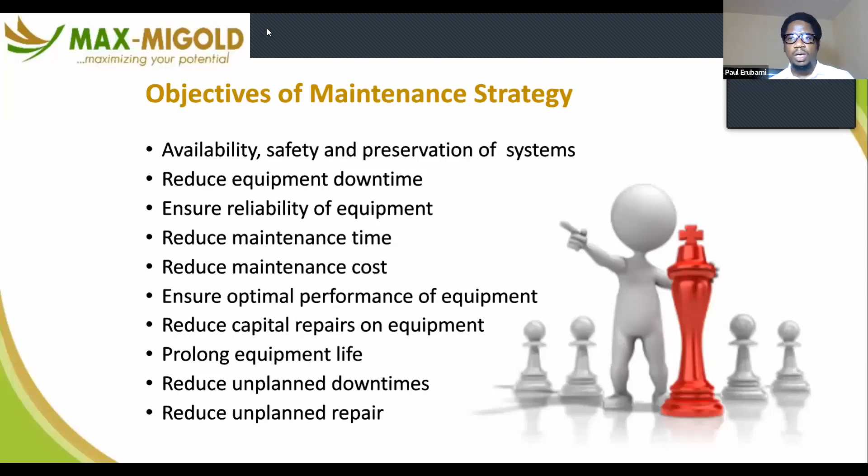Your maintenance program should not on its own become an impediment. This is one area where facility managers need to think about why they do the what and the how. If you are having to shut down equipment at a critical time of need to do something as good as maintaining it, you are becoming a nuisance to the organization. So you need to revisit why you are doing what you are doing. What did we set up that equipment for in the first place? What are we getting from that equipment? How critical is that equipment and asset to us? Must I do this activity at this time? How much disruption are my maintenance activities going to create for the users of the facility or the assets?

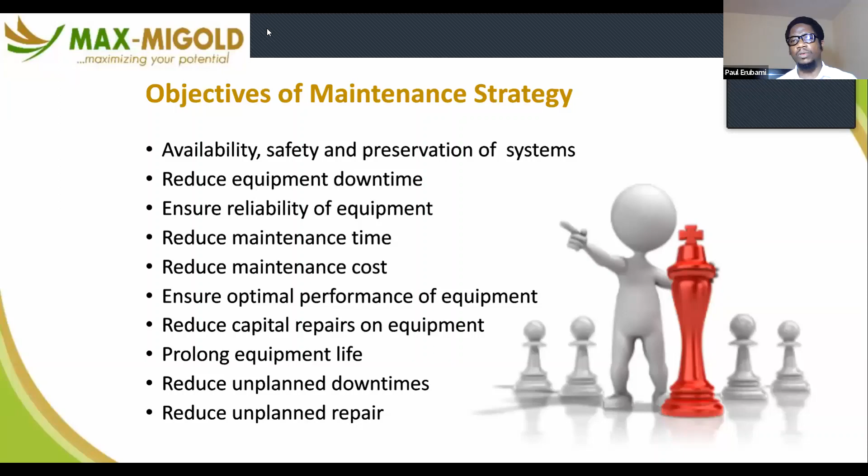And then what about costs? You can't maintain at all costs. In fact, some people have maintained at so high a cost that owners of certain properties have decided, you know what, let's just leave it, don't bother, when it's broken we'll replace it. Of course, when we get to the strategies, you'll begin to realize how cost and reliability relate, and exactly why certain decisions are taken that you may not agree with management on in the course of using or running your assets. And then, of course, we want optimal performance, reducing capital repairs on equipment, upgrades and overhauling.

You want to prolong the life of the equipment as much as possible. Every equipment will go through a degradation curve, a time when it's high in performance, then the performance dwindles until you cannot do anymore. But you want to elongate the x-axis on that curve, which is the time or lifespan of that asset.

You want to reduce unplanned downtimes. It's bad enough that you have to shut it down sometimes for routine maintenance. You don't want to also suffer the equipment shutting down when you expect it to be up and running. And all those unplanned repairs have a ripple effect on your equipment—one part breaks down suddenly and then it grinds on other parts.

You try to get equipment to do a critical repair quickly, and then you have to bear so much high cost because you're under pressure to deliver quickly. You don't have a lead time you can wait for, and so many complications can come because of unplanned repairs. And then management sees you as ineffective, as not productive, as wasteful, even with all your best intentions.

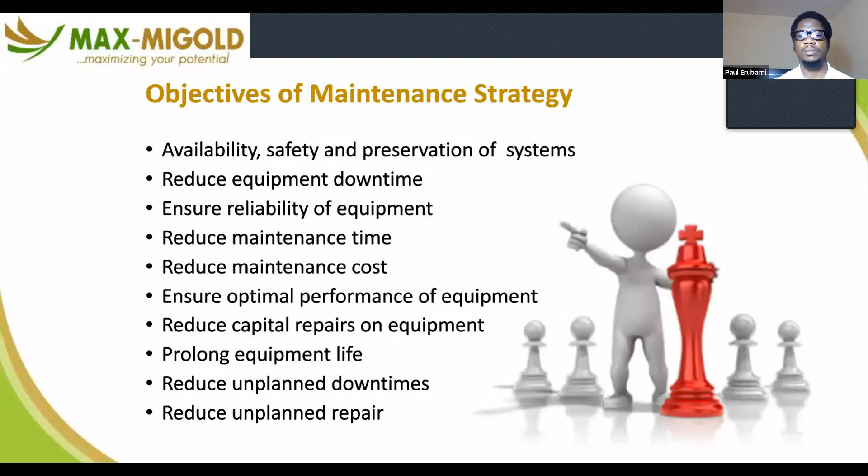So what do you consider when choosing a maintenance strategy? You think about your understanding of the methods of each strategy. Each strategy has different methods, different goals, and there are advantages and disadvantages of every strategy. The advantage and disadvantage of every strategy will not even be the same for every asset category or asset type. Therefore, not all strategies that may be advantageous for one asset class may be useful for another.

For example, your block work in your buildings—one strategy may work for maintaining and managing your block work, your roof, your floors, your doors and windows, most of the static equipment or components in your facility. That strategy will be very wrong if you try to apply it to moving equipment with moving parts, for example engines and machines with rotating parts that are having friction on an ongoing basis. The strategy will have to be different.

So you have to think about how you put together a maintenance strategy. If you've not defined a maintenance strategy, your maintenance plan, no matter how proactive you think you have been in developing it, you are making a mistake. In fact, without defining a strategy for every asset line item, most of the things you are doing regarding maintenance of those assets are all wrong.

Okay? So even if you've copied what people have done before that has worked for them, you've brought it into your own space—you start thinking about the why and developing your own strategy for that asset, you may be making a huge mistake, even with the same asset. And that's what we're going to learn in today's class. This is elevating your thinking about maintenance beyond the day-to-day mundane task of maintenance to why we even have those activities set in place in the first place, right?

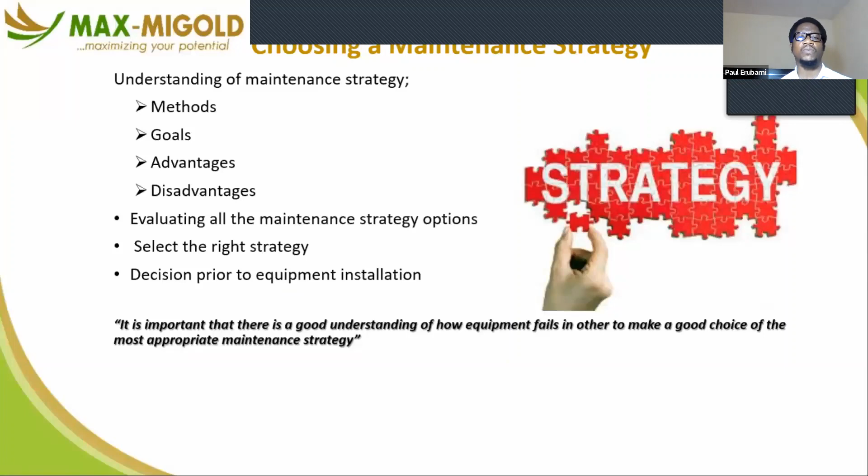Then two, the kind of impact you have on assets—for example, environmental impacts, rate of use—might have different levels of deterioration impact on your facility or your assets and components. And as such, you must think about what strategy to deploy in managing such facilities so you can get the best result, or at least reduce the rate at which the condition deteriorates or increase the lifespan of that asset as much as possible.

Okay, so by the time we start looking at the strategies themselves, it will be easy for you to relate with these introductory aspects. How do you choose a maintenance strategy? What are the criteria?

How much do you have and how are those financial resources allocated and applied? If you have a system where there is a working fund, money is always kept in a pool, and you can be doing all your proactive plans without having to go back for new approvals and disbursement, you might think about a strategy that does not require stocking up or doing anything big at a time. You just go with the flow—what's due on Tuesday, the material coming on Tuesday, you get it done and move on. But if you have to go through a long cycle of capital acquisition, disbursement, and approvals, you probably say, instead of going through this cycle over and over on a weekly or monthly basis, I better stock up for a quarter.

So your strategy is going to be affected by allocation of available resources, including the kind of manpower. If you have staff in-house to handle all the activities, your strategy will be different from when you have to call out a vendor who takes your request, processes it, sends it through staff, and gets them to your site. The strategy will be different depending on the kind of resources available and how they are allocated.

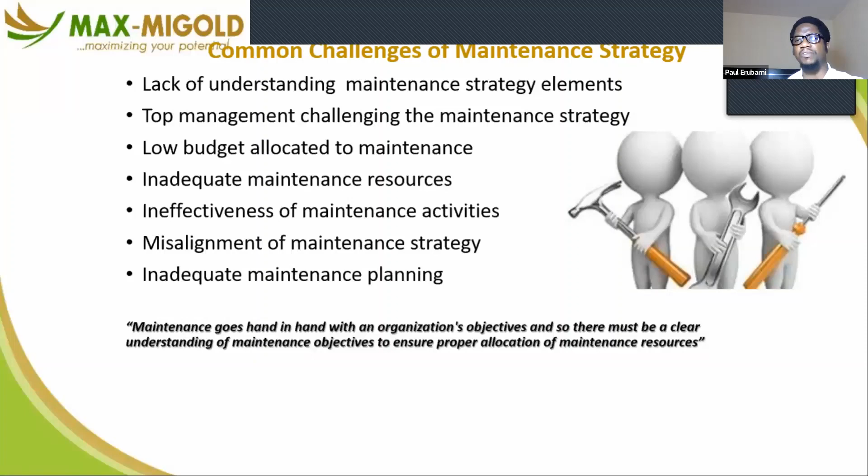Maintenance goes hand in hand with an organization's objectives, and so there must be a clear understanding of maintenance objectives to ensure proper allocation of maintenance resources. If your maintenance objectives align with that of the organization, there's a very high likelihood that everything you want to do will always find approval.

So now to the first maintenance strategy. This maintenance strategy is the most common, the most popular. But many facility managers don't seem to realize that it's a strategy and don't seem to apply it deliberately as a strategy - it just happens to them. It's called run to failure. This is also called reactive maintenance strategy, corrective maintenance strategy, or emergency maintenance strategy. Every one of the unplanned maintenance strategies merges into this run to failure strategy.

Because there are two types of maintenance, primarily: one is planned maintenance, the other is unplanned maintenance. While planned maintenance has more than one strategy we're going to look at today, unplanned maintenance has just one strategy. Every unplanned maintenance strategy is called a run to failure strategy. It simply means that you don't do anything - the maintenance activities for that asset is zero. If it fails, threatens to fail, manifests a fault or an impending fault or a disruption or a slowdown or whatever it is that is tending towards failure, you take action to bring it back. That's basically what run to failure is - you restore the equipment to its intended function.

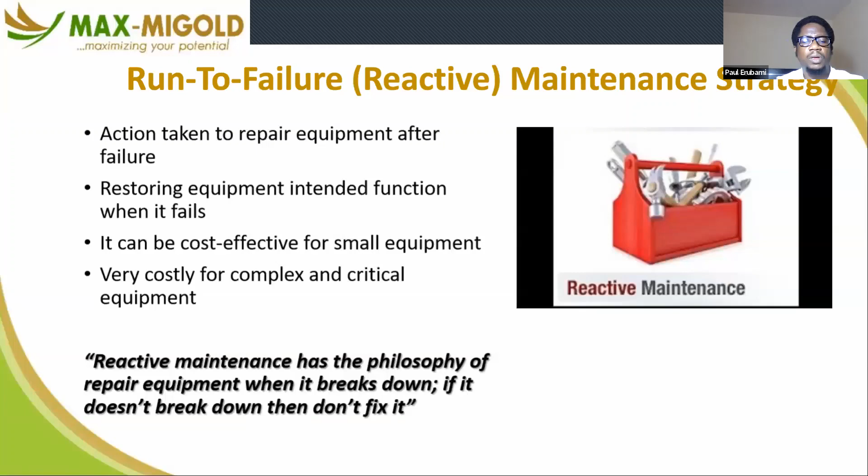Fix. Reactive maintenance has the philosophy of repair equipment when it breaks down. If it doesn't break down, then don't fix it.

I was curious. It's so hot, this furnace is so hot, how do you even carry out maintenance on them? Chief engineer says, this furnace has been on for 18 years, and it will take us months. If we even decide to shut it down to do maintenance right now, it will take us months to wait for it to cool down enough for us to do any kind of maintenance. And I said, aha, this, you will not put any other strategy. You kick it on, you use it until it coughs and puffs and stops. And then you have to deal with it.

Think about your wristwatches and wall clocks. Complex mechanisms. You hang them up there, put them on, drop them, until it develops a fault, stops, or something, battery goes out, or something happens to the spring. You don't do anything. Are you conscious about that strategy? Or is that a mistake that you're allowing like that?

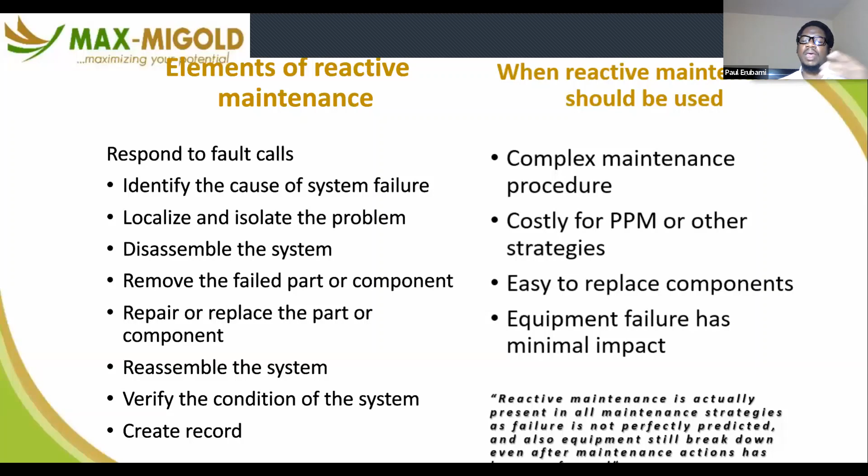Reactive maintenance is actually present in all maintenance strategies, as failure is not perfectly predicted, and equipment still breaks down even after maintenance action has been done. You need to be conscious about what this strategy is and how you are applying it, because there are certain implications of deciding to use this strategy to manage your roof, your walls, your furniture, your fittings, and so on. Those implications are what we're going to look at.

You don't have to put people on standby because you don't have routine activities to perform. Initially it looks like low cost, especially for equipment without moving parts. Moving parts, I wouldn't recommend this strategy, and we're going to see why as we go to the next strategy. And then there's not much to plan. If what you have to plan is a plan that says don't do anything, how much planning do you still need to do, right?

But the labor cost will be high every time you have an incident, same with your repair costs. The staff assigned to routine activities in your normal operation will be suddenly diverted to deal with repairs that just rear their ugly heads when you were not expecting it. So your staff resources will not be efficiently used. Equipment will not be reliable, especially for equipment with moving parts and critical equipment, because you cannot predict when they will fail, and that is a problem for certain assets.

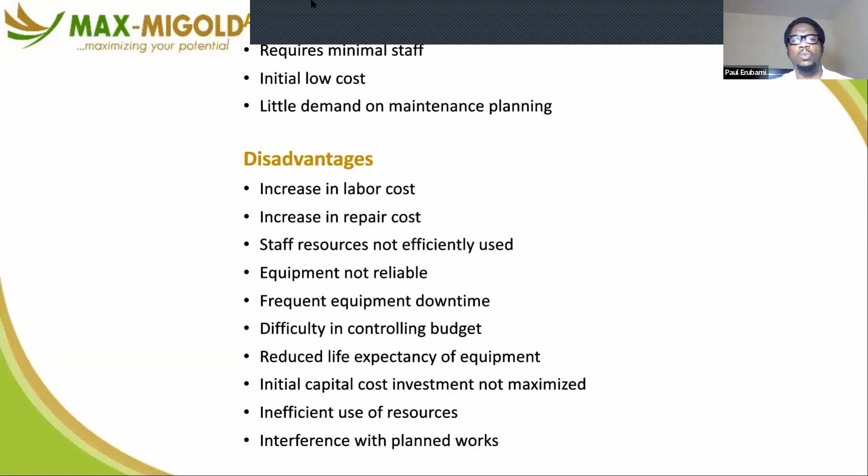And then there will be interference with planned work. Just the same way you have people who should be doing planned work being drawn out to come and take care of unplanned activities. So that's all about that first strategy.

It is, in my opinion, the most important strategy. And don't think that because other assets that you deploy other strategies for will fail, therefore the strategy has changed. Strategy is something you set. You work with the strategy. Strategy remains what it is, even if you fail to implement the strategy. And it is the most important strategy for me, again, because it accounts for a majority of all our assets.

What makes FM look so confused and disorganized, and always running from pillar to post, is because they don't think of the assets that require this strategy and deliberately assign the strategy and make plans to ensure that there's resources to deploy this strategy. They go from hand to mouth, cap in hand, every time something happens. Rain falls and the window is blown out. Oh, it's an act of God, right? They do not envisage or anticipate that a window could be blown out.

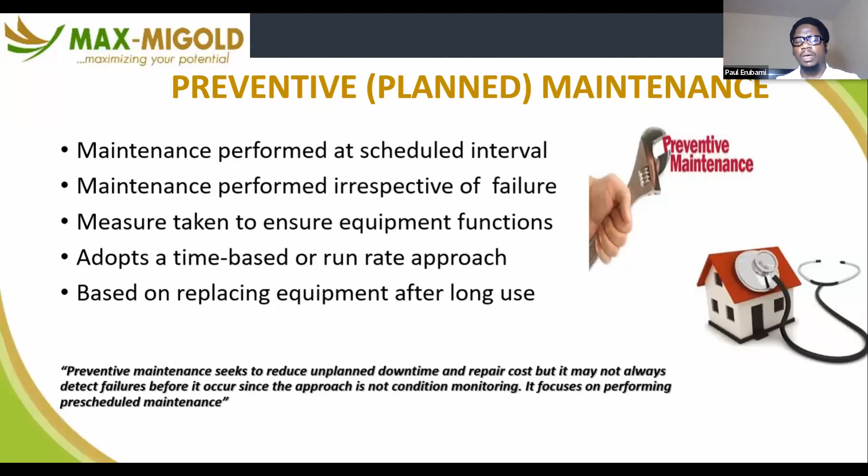So you can have a plan for: I have 500 windows, 2 or 3 could be blown out this year. Last year it was 1, the year before it was 2 or 3, and so on and so forth. That's the kind of thing we're talking about. You forecast and you plan and you budget for it.

This second strategy, the preventive maintenance strategy, is very familiar to many FMs. The routine things that you do on a regular basis. In fact, the word PPM is a buzzword in facility management.

You put certain assets on a spreadsheet, and you put some frequencies, and you put some activities that need to be within those frequencies. You put who would do it, how much it's going to cost, and you build out something. Oh, yes, fantastic. Because at certain intervals defined by the frequency, those activities must be repeated on that asset. Doesn't matter whether the equipment is in good shape or not. You just have to perform the things that have been specified within those frequencies. That's what planned preventive maintenance is all about.

It adopts a time-based or a run rate approach. A time-based is weekly, monthly, quarterly, annually activities. A run rate is if you have a clock in the equipment that measures its rate of turning and working, like generators or photocopiers. They have a clock in them that tells you how many turns they make, and how they work. So you don't necessarily need to say, oh, my car has worked for 6 months, let me take it for servicing. No, you probably need to track the mileage. That's the run rate. The generator, the hours run, that's the run rate.

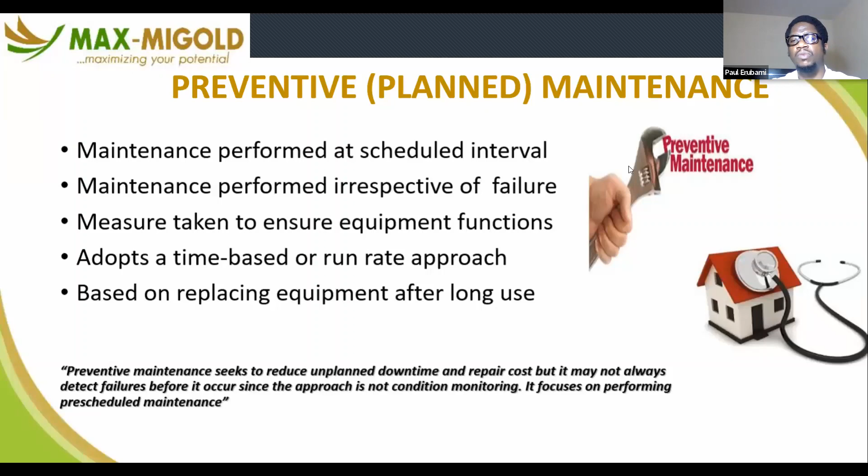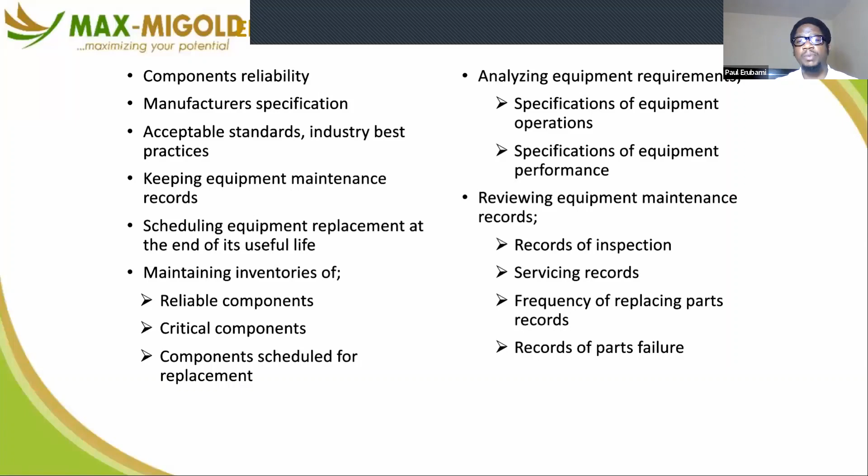The whole idea is stay on the safe side. If I keep doing what the manufacturer said I should do, I will not be blamed. And I have a record, because if you're doing routine activities, you just keep a record of when it was done, what was done. And you have a sense of accomplishment. You're doing something. It's also a sense of an alibi. If it fails, because it will still fail even if you do everything, well, I've done my part. Now that it fails, it's not my fault. I'm a good FM, right?

So preventive maintenance is the safest approach to maintenance. It is maintenance for dummies, if you ask me, because what needs to be done is defined, how it should be done is defined, when it should be done is defined. Everything - just read it and follow it line by line. You're good. You don't need to think or overthink the process. And because it's been pre-planned and pre-arranged, the likelihood of sudden failures or sudden disruptions is reduced. So you're safe to a large extent.

And then, of course, there's higher performance, reduced downtime, fewer repair emergencies. Equipment seems to work better. They're often safer, especially because not all equipment - not all assets - you will use this strategy for. For the ones it's most appropriate for, then yes.

Does it have some disadvantages? Of course it has. You're going to spend a lot more because you're going to have standby people doing routine activities. And there's so much activity you're performing that are not needed. Equipment is working perfectly, we are spending money on it, just because, of course, you don't want it to break down the line. But think about what you are doing.

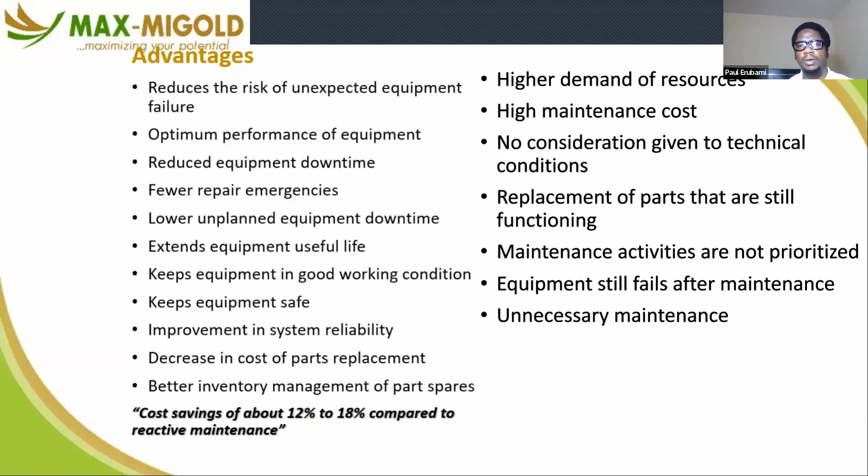If you're critical about the cost of your maintenance, you ask yourself: if I take out a filter, has that filter actually finished doing its work, or am I wasting some life of this filter? If I take out that oil, has it finished doing its work, or am I wasting some of its usefulness? So we say there's a lot of unnecessary maintenance. That's the key downside of this approach. In terms of giving you peace of mind, super, but then you pay a very hefty cost because you are doing something on a continuous basis, whether it's needed or not.

And that's what this third strategy is coming to fix. The predictive maintenance strategy is also called condition monitoring, or condition-based maintenance, because it evaluates equipment condition before acting on it. Going back to draw parallels from the two previous strategies: in run to failure, it has to actually exhibit a fault - that's what that strategy requires. In preventive, I don't even check whether it has a fault or not; in its perfect state, I keep doing what I'm doing persistently. In predictive, I don't want to waste resources on preventive maintenance, but I also don't want it to break down - it cannot break down. For it not to break down, I must preventively monitor it, track and trend its condition based on operating parameters set in place by the manufacturers.

Take your generators, for example. It will operate at a certain temperature, it will have a certain level of vibration - if it's more than that, there's a problem. It will have a certain sound level - if the sound level is more than that, there's a problem. It will emit so much carbon and so much density of this and that. These are all operating parameters - they have been specified, I know the ranges. If my equipment keeps working within those upper and lower specification limits, then run it, no problem. I just keep monitoring and tracking those operating parameters. If it stays within those ranges, I'm fine - temperature stays within the range, I'm fine. Keep running everything, just keep enjoying the assets, but keep your eyes on those operating parameters. That's what predictive maintenance is.

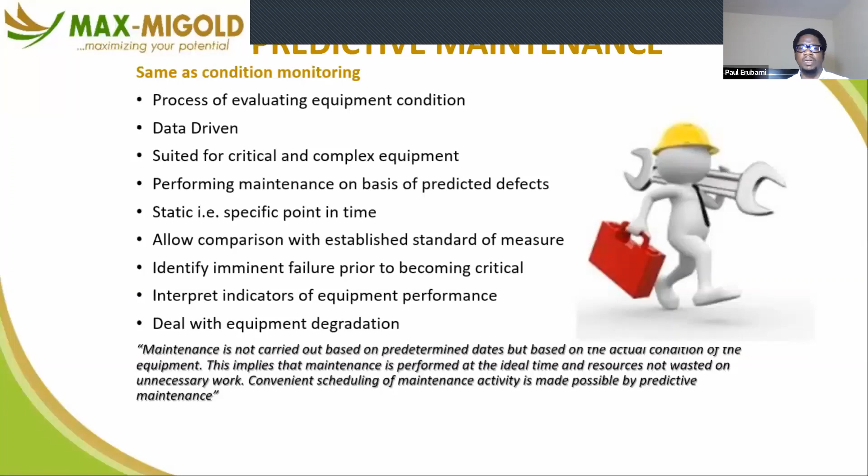Maintenance is not carried out based on predetermined dates, but based on the actual condition of the equipment. This implies that maintenance is performed at the ideal time and resources are not wasted on unnecessary work. Convenient scheduling of maintenance activity is made possible by predictive maintenance, so that what you are tracking and trending, you are acting on.

Take the engine of the generator, for example. The temperature is trying to go out. It used to stay around 40 to 44, and then for the last one week it has gone from 46 to 48. I know that the upper limit is 90 degrees. So what do I do? By the time it gets to 50, I can plot.

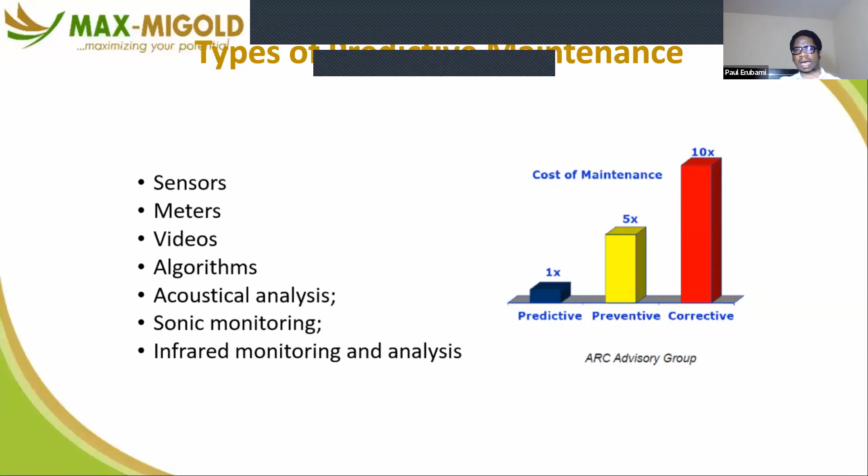By the time I plot, I know exactly what day, at this rate of rise, it will get to 90. I know how many days I have to act. So I go to the manual and troubleshoot for overheating: check radiator coolant, test, check, it's in order.

Not radiator. Okay, check the oil, take it, test viscosity, take dissolved metals, check density, looks okay. What next? Check the oil pump. Is the pump actually pumping the oil through the engine? Just checking. And if I find out that one pump is what fails or works intermittently causing this issue, I stop, I change that, and the temperature comes back to normal, and we're all happy again. All that routine maintenance I would have been doing will no longer be necessary.

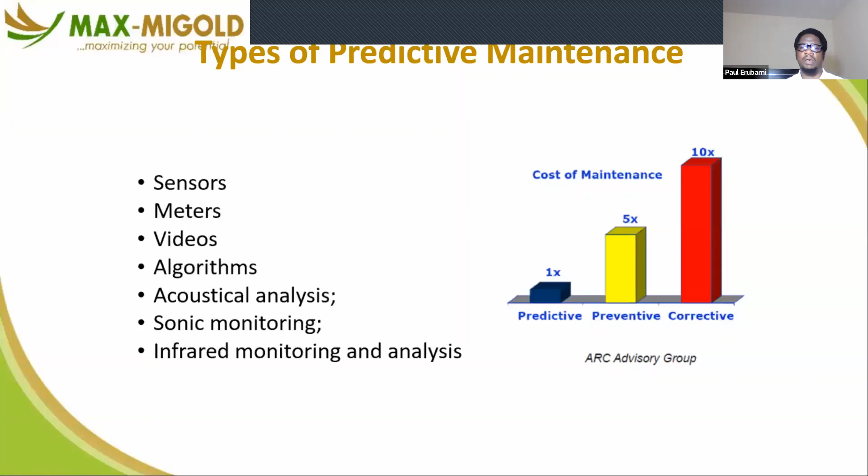But this maintenance comes at a front-end cost: data acquisition tools. These are some of the operating parameters that your equipment will be required to work within certain ranges, upper and lower specifications. As such, you must have systems in place for tracking where you are at a particular time relative to each of these operating parameters, so that you can know that it is within range or going out of range.

But again, the beauty of these three strategies of maintenance is for equipment that you will typically deploy a preventive maintenance strategy for, if you use corrective for it, you will spend 10 times the cost of maintenance, because breakdown has not just the cost of increased breakdown repair or restoration cost, but also the cost of downtime, which is the cost of lost productivity. So corrective can be very expensive, especially if it affects your core production or core productivity of the organization.

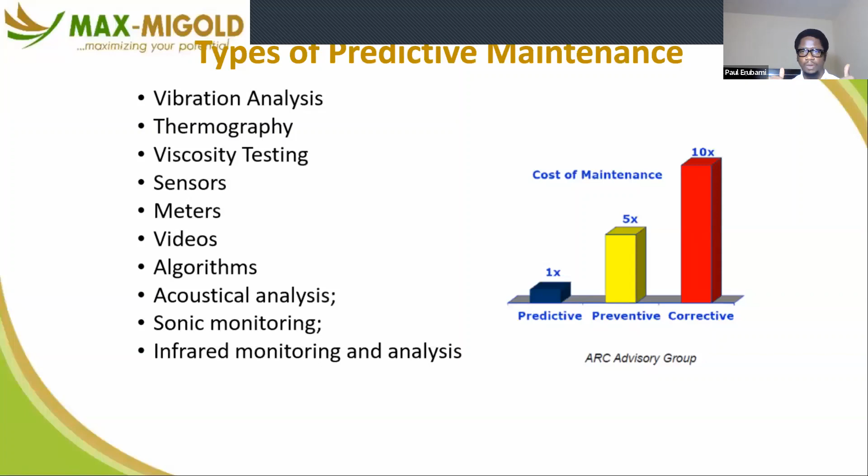Preventive is 5 times and predictive is the cheapest. So in essence, predictive maintenance is the cheapest form of maintenance if you can pull off the technicalities around it. The level of data and all it takes to acquire that data, analyze it properly, and make the best judgment out of it will make predictive an effective tool for you as a facility manager.

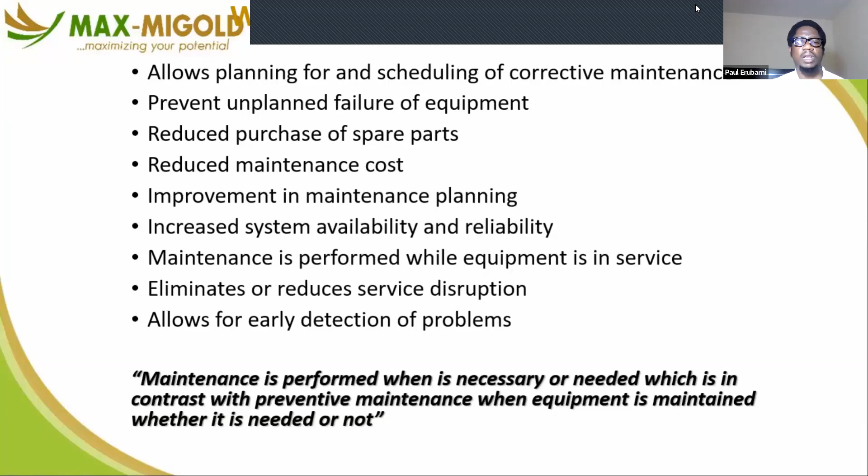So why use predictive maintenance? It allows planning for and scheduling of corrective maintenance, prevents unplanned failure of equipment, reduces purchase of spare parts, reduces maintenance costs, improves maintenance planning, and increases system availability and reliability.

Maintenance is performed while equipment is still in service. So it didn't break down by itself, and you didn't schedule it for maintenance. You just keep investigating and acting in such a way that the equipment can keep running. And then it eliminates or reduces disruption and allows for early detection of problems.

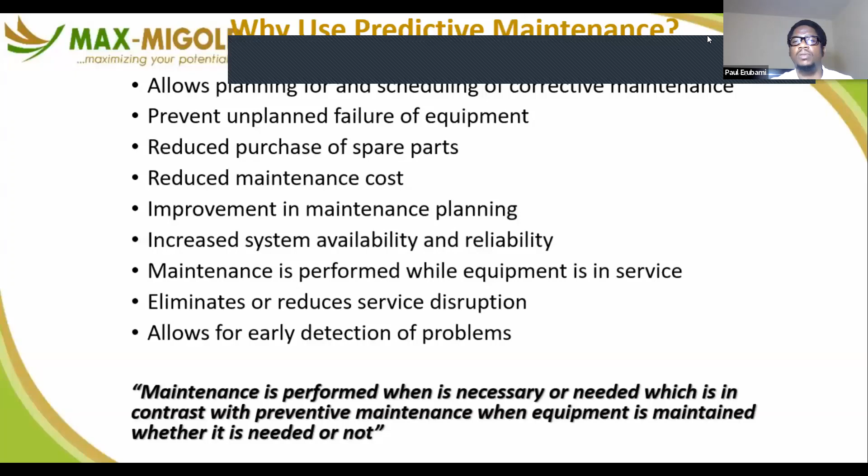Maintenance is performed when necessary or needed. This is very different from preventive maintenance, which is done whether it's needed or not. You just keep doing the same routine on an ongoing basis.

If you look at the advantages and disadvantages of predictive, you will see that it tries to fix the problems of reactive by making sure there's no breakdown at all. And then it also tries to fix the excesses of preventive by making sure that you don't do anything unnecessary just to prevent a breakdown. That's the beauty of this approach. But it's really, really top-end approach.

I mean, think about it. If you were the one managing the Kainji Dam or any of these major dams that are providing power to the whole country, how often will you shut it down to do maintenance on them? You have massive dashboards with sensors everywhere, bringing in data, telling you exactly how each operating parameter in every pump, every turbine, every aspect of it, even the shaft and the pulleys, how they are working, how the cables, temperatures are being monitored. You have all of them, how the oil temperature, everything, being monitored on dashboards.

That's all you'll be doing as predictive maintenance. Anything going out of range, you see that trigger, and then you go and act. That's the only way to manage very large equipment. I mean, think about it. If you're managing a gas turbine where the engine oil for replacement is probably 30,000 liters of high-grade synthetic oil that runs into millions of dollars, will you be replacing it every 250 hours?

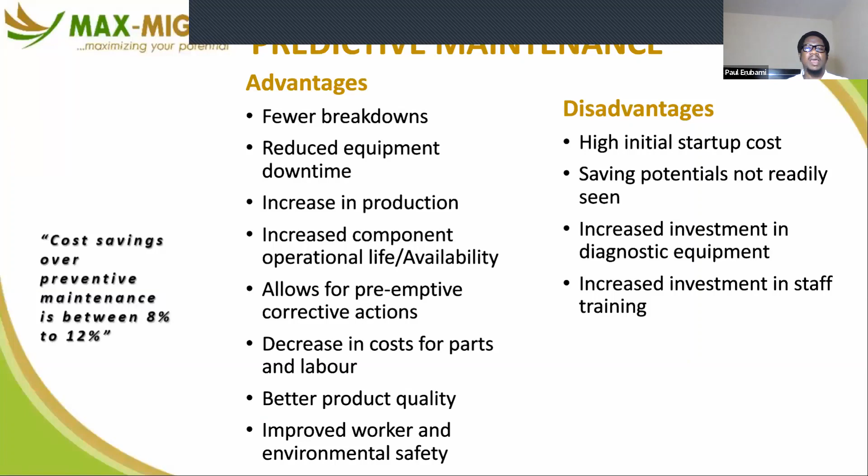So if you do oil analysis on a continuous basis, you can tell which particular components in your machine or engine are wearing faster. You can even predict when a particular shaft or pulley is going to have a problem next year and prepare, because you are seeing the level of wear and tear just by analyzing the oil on an ongoing basis. You will never have a breakdown, and yet you will never have to stop the equipment to go do maintenance.

Now, at the level of strategy, we are talking about each asset. One asset, what's the strategy for maintenance? The next asset, what's the strategy for maintenance? But as a portfolio of assets, we need to think about maintenance that gives us high reliability and low cost. How can we achieve that? That's where RCM comes in. It's a philosophy of maintenance that helps you select, pick and choose strategies for various assets with the goal of having overall portfolio performance at the least cost.

We call it the economics of maintenance. We combine different strategies for different assets just to ensure that overall we get the best experience, the least cost, the highest performance and reliability, and quality asset availability. It takes a longer view of the assets. So if you're going to deploy a strategy for your window ACs or split ACs that is different from what another person is deploying, it is because of your RCM analysis that you can make such a decision.

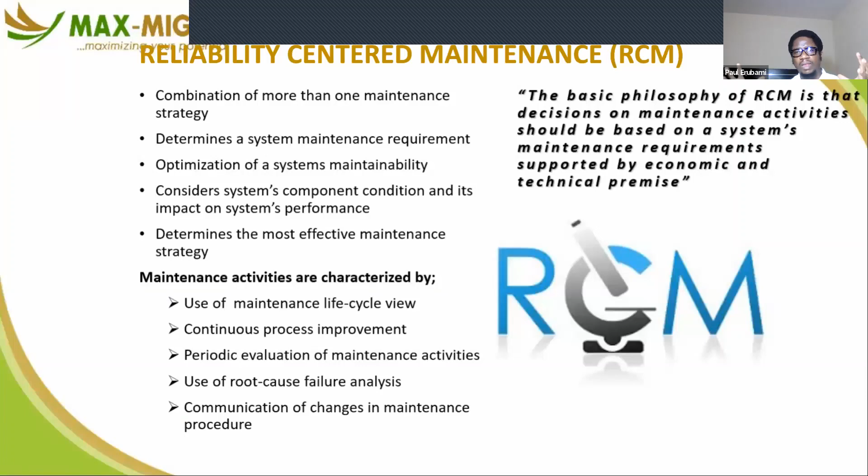The ACs probably are not critical, or their downtime will not lead to productivity losses. I will put them on run to failure just to reduce my routine maintenance costs. Whereas another person cannot put his own split ACs or window ACs on run to failure, because you need to do your reliability-centered maintenance analysis on your entire portfolio.

Now, this is where many times you have to think again. You may have a critical system like air conditioners in your server room. Very critical, the server room cannot go hot. But the server room requirement is 1 unit of a 2 horsepower AC, which can carry that server room conveniently. But just to make sure you don't have any issues with that server room, management has decided to put 2 extra 2-horsepower units, which means you have N plus 2, or 1 extra 2-horsepower unit, which means you have N plus 1 strategy of redundancy in that server room.

If I get the pleasure or privilege of having an N plus 1 or N plus 2 for any critical asset, I can adopt a run to failure strategy for that asset. Because I have a redundant, fixed-in-place replacement alternative, once this one shows any fault, the AC stops cooling, it starts making noise, it starts dripping water, I shut it down, I put the next one on, and then I take it out for repair. I don't need to necessarily come to do routine maintenance on this particular AC or any of the ACs, because I always have the time to use one or the other.

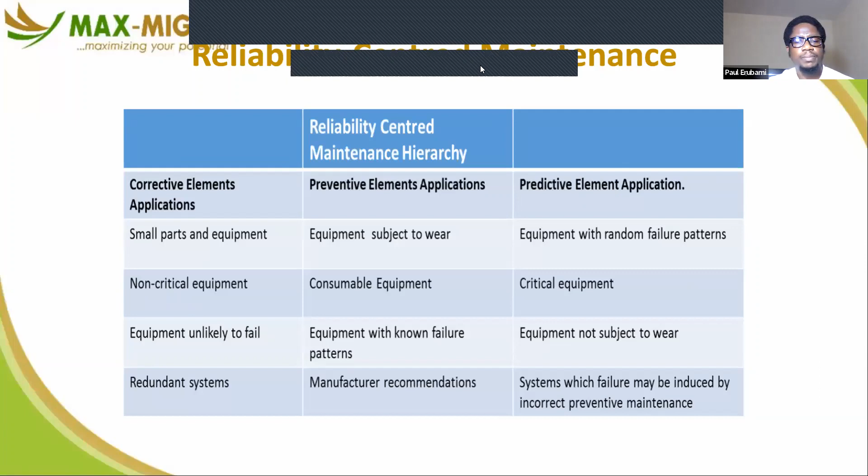And then I do the same thing: analyze the ones that are supposed to be on preventive maintenance, analyze the ones that are supposed to be on predictive maintenance using these guidelines. You can adapt or adjust this framework for RCM to suit your organization's requirement, your strategy as an organization. You can move some of these criteria around just to create your own RCM hierarchy. And then you use this to look at every asset one by one and say, this asset...

Where does it fall into? Then I now assign that strategy to that asset. And I'm assigning that strategy to that asset because it is the cheapest cost that I will spend if I use that strategy for that asset.

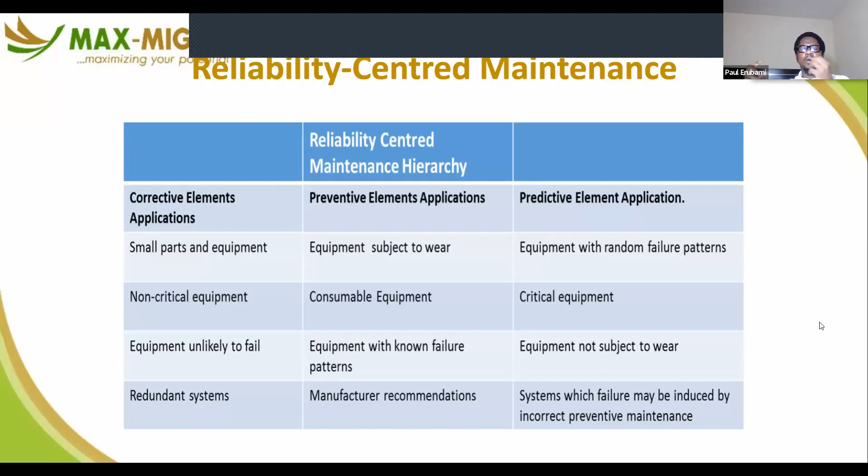If you look at the advantages and disadvantages of RCM, they are very close to those of predictive maintenance. Why? Predictive maintenance tends to fix the errors of the other two strategies. The RCM has that advantage, that overarching consideration for all your portfolio, considering all three strategies.

So what does this mean? Items that I run to failure, I can drop down to preventive. If they are still expensive, I can drop down to predictive. I keep targeting the least cost altogether for my portfolio. So if you look at these advantages and disadvantages, you see that they're very similar to predictive because it tends towards progressing, for critical equipment, progressing you towards predictive.

So it's FM that have advanced in maturity, professionalism, and expertise that can actually start adopting RCM and predictive. In the meantime, everyone else just starts by being able to move from normal repairs that is not maintenance yet, into maintenance where you know what and how, and you have a schedule for doing that, which is planning. Then you move to the level where you understand strategy and stay safe on the preventive until you have what it takes in terms of knowledge, resources, skills, technical ability to move to predictive. But again, because you understand strategy, all of the assets you're currently ignoring...

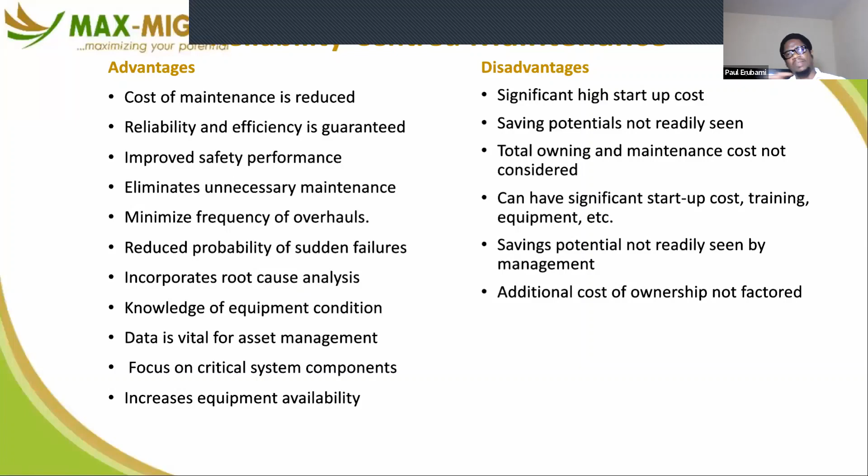So that's why I would normally tell you, scrap the preventive maintenance plan. Create your maintenance plan that includes every line item in your asset register. You can filter out a preventive maintenance plan from that. So you can now say, these are the ones I've adopted preventive maintenance for. Just the same way you can filter out a reactive or run-to-failure maintenance plan from that, where you can now say, these are the assets I've adopted a run-to-failure strategy for. And you do the same thing for predictive.